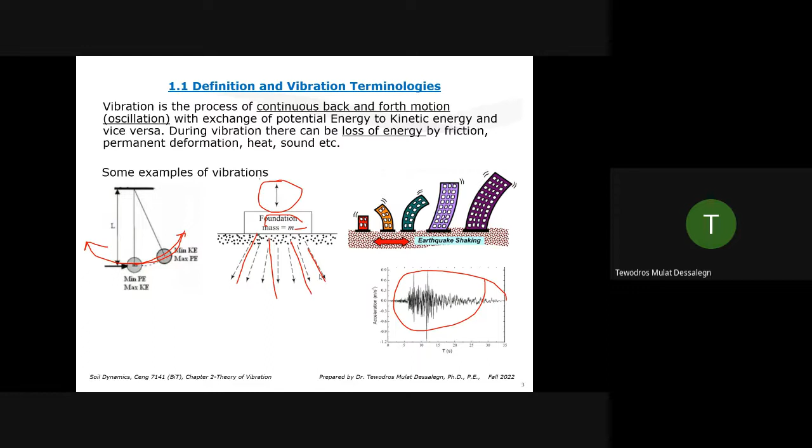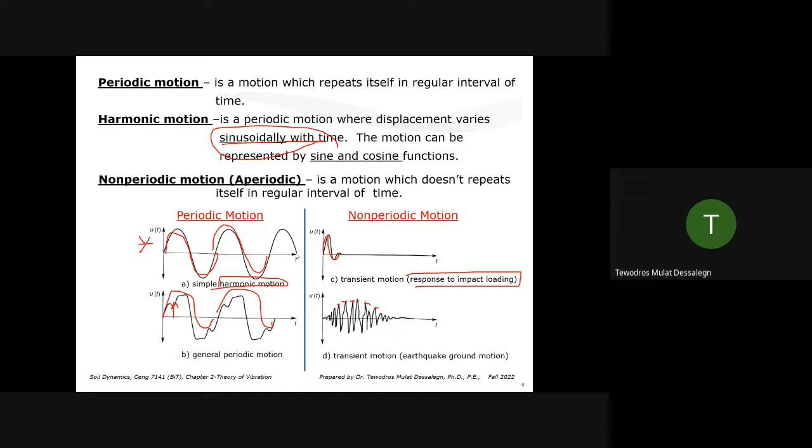And you can have a periodic motion, a motion which repeats itself in a regular interval of time. And a harmonic motion is a motion which can be represented by a sine or cosine function or a combination of the two. And non-periodic motion is a motion that doesn't repeat itself. It's kind of irregular.

And period and frequency, these are the most frequent terms we'll be talking about in this section. If everything vibrates back and forth, then the time it takes for one complete cycle, we define as a period. So that's called a natural period. And every object, every building, every structure has its own natural period. If you give it a free vibration, there is a time period it takes for one complete motion. And the unit is second.

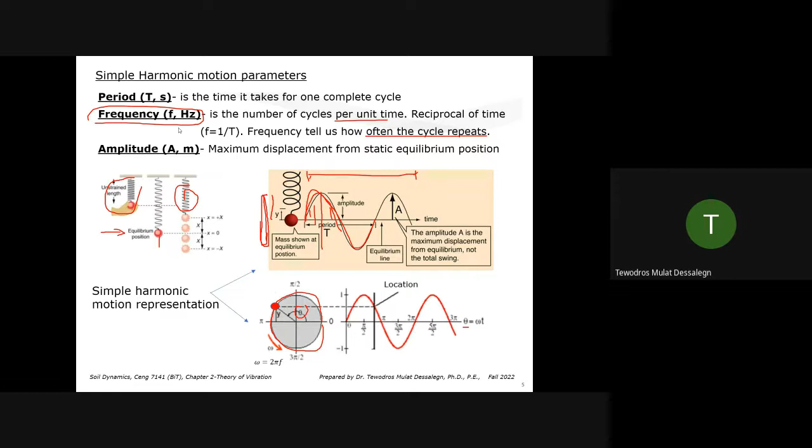Sometimes it's confused with a time period, but when we say a period, it's for one cycle of vibration. And frequency is just the inverse of period. It tells us how often the cycles are repeating. You can have a motion with a high frequency or low frequency depending on how many cycles you have.

And we also discussed damping. Damping is just a loss of energy. Energy dissipates at some point. We'll discuss damping in detail in the follow-up chapters. We'll divide it into two: viscous damping and radiation damping. Viscous is when we say it's just a material damping. Particles are rearranging or deforming, and there's a friction loss between particles. That's what we call viscous damping.

Radiation is when you have, depending on the geometry, reflection and refraction of the wave itself, and depending on how wide your medium is. So that's the radiation damping.

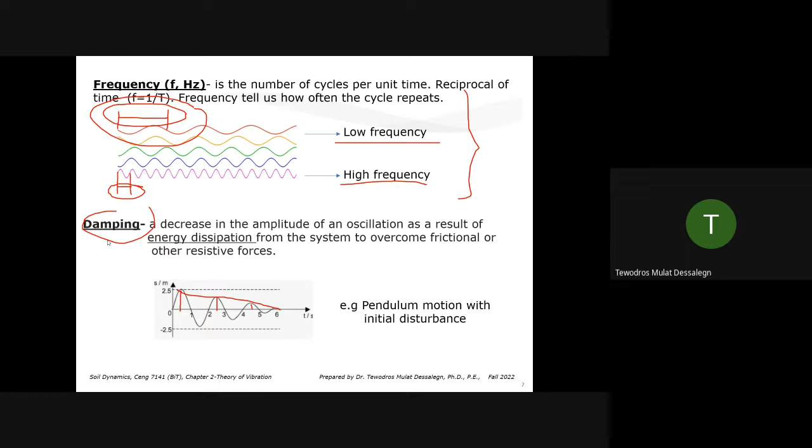Anamut, welcome to the class, Anamut. So we'll discuss your question at the end of the class.

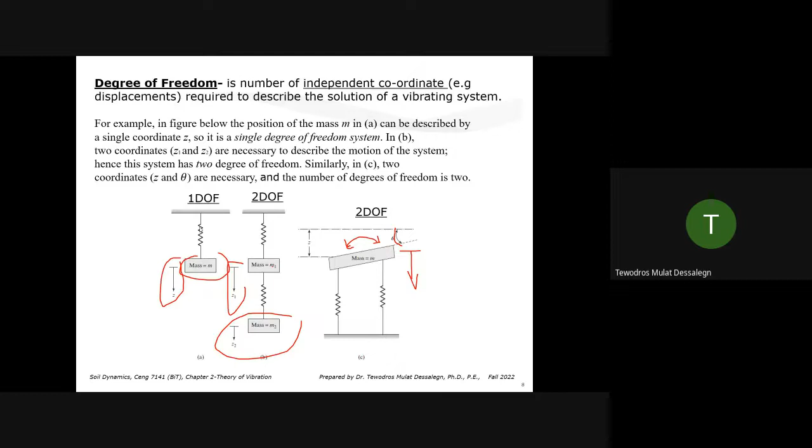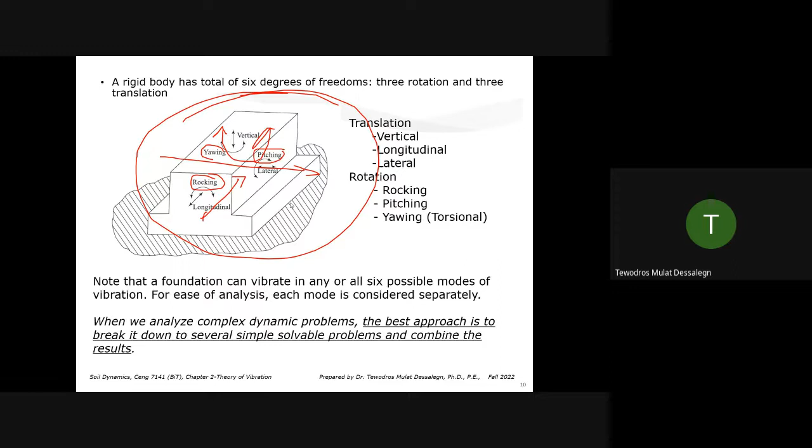And degree of freedom is the number of independent coordinates that you need to completely describe the motion of an object. You can have a 1 degree of freedom system, 2 degree of freedom system, and even more. To completely describe a solid object or a rigid system, you can have a 6 degree of freedom system, 3 rotation and 3 translation.

And we also discussed the spring mass damper model. This is a simplified way of representing a soil mass or any object, where the spring represents the elastic nature of the soil and the damping represents the dissipation of energy. If you apply a force at the top, that force dissipates with depth, because particles rearrange, there is a friction loss between particles, and so many things like that.

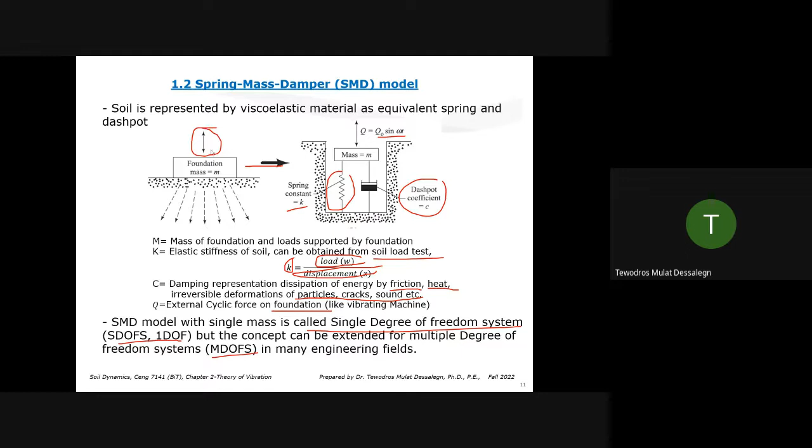So that dissipation of energy we represent by a dashpot. And the spring is the elastic response of the soil. And the mass is the mass of the foundation block, and if you have a motor vibration at the top, the mass of the motor at the top. So, more examples of single degree of freedom systems and multi-degree of freedom systems.

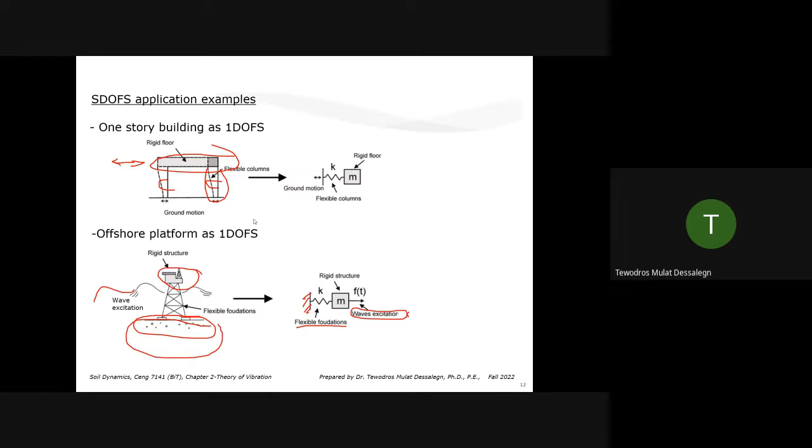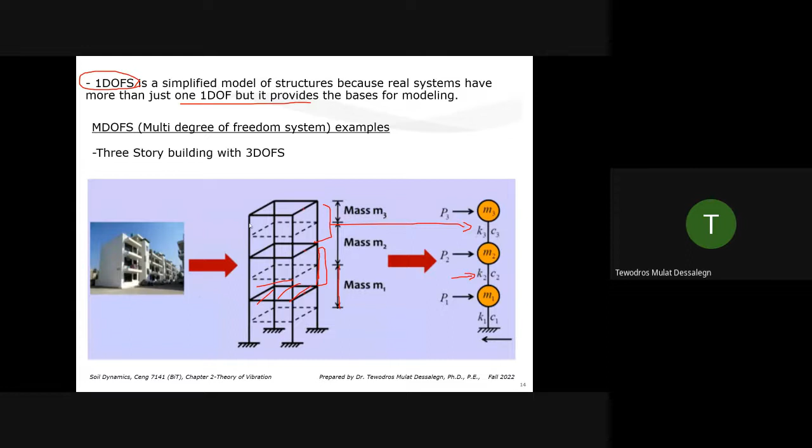You can have a building with a multi-degree of freedom system. In this simple example, you have just a 3 degree of freedom system, the entire stories lumped as 3 masses. But if you model this in structural software like SAP or STAAD Pro, you can have thousands of degrees of freedom. It's just an example of how you can model it.

Okay, I think we covered this point last class. This section is a general equation of motion for an externally applied force. So if you see an object like a mass where we're applying an external force P to the right, if you see this P applied force, let's assume the floor it is sitting on is frictionless. So there is no force of resistance at this point.

Now, for the force of resistance, let's say you have a spring and a damper. This is just a simple example of how we modeled our foundation block. You have the soil represented by an elastic spring and the dissipation of energy by the damper. And you have a mass and some kind of force. It can be a static force or a dynamic force. So if you draw the free body diagram of this mass, you have a force, a damping force, and a stiffness force. And also you have an inertial force acting on it.

So if you apply Newton's second law, for a mass subjected to a force, you have an equivalent inertial force acting in the opposite direction on the mass itself. And also you have resistance because it's sitting on something or attached to something with a damper and a stiffness. So if you find the equilibrium, you have applied force minus damping force minus stiffness force minus the inertial force equals 0. Everything has to be 0.

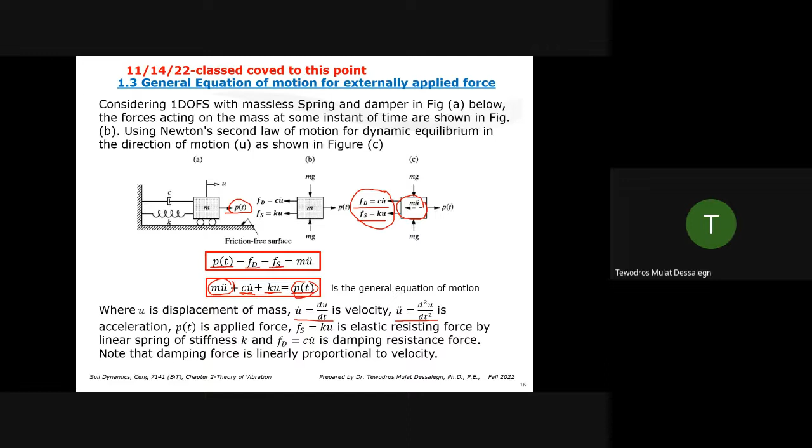You can arrive at the same equation of motion using D'Alembert's principle. It says, for any object in motion, the externally applied forces, inertial forces, and forces of resistance form a system of forces in equilibrium. It's very similar to Newton's second law. We are doing this equilibrium in the horizontal direction. In the vertical direction there is no vibration, but there is gravity downward and a reaction from the floor. So both directions should be in equilibrium.

For a static problem, the velocity and acceleration of the mass are negligible. Everything is in motion. The Earth is rotating around its own axis and around the sun.